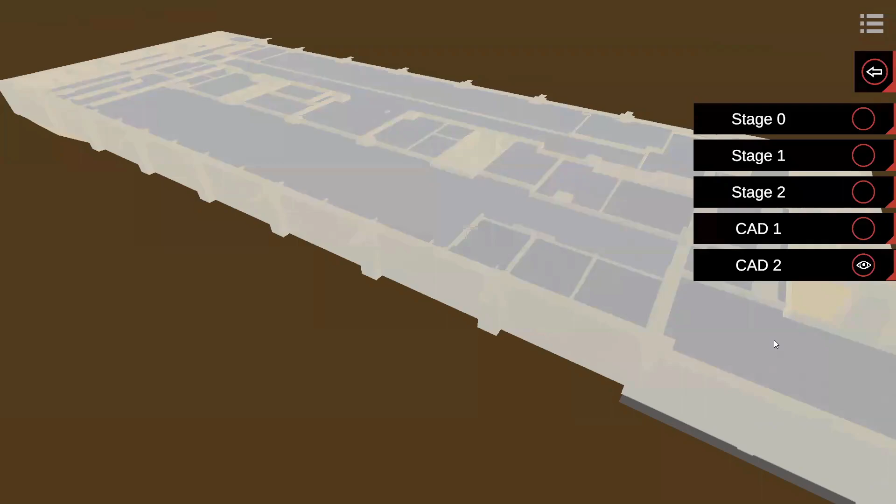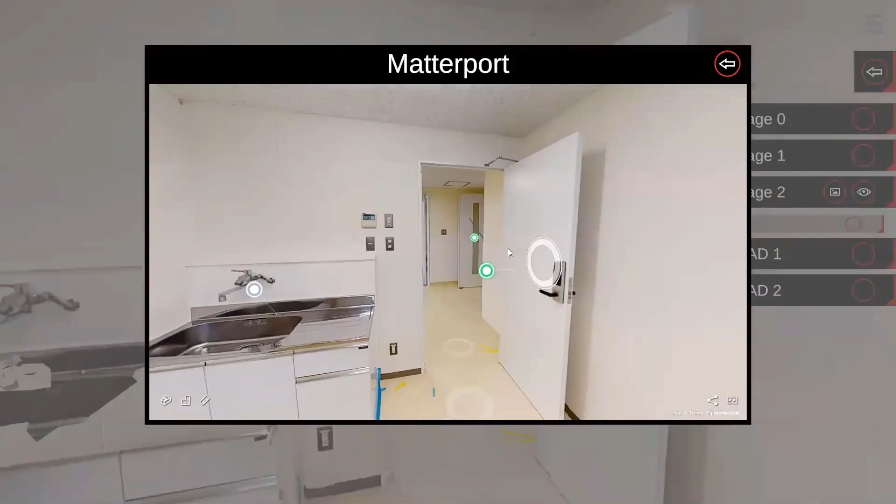So we are working for the digital construction department within Nohara, our team, and we provide services within BIM, consulting, 5D cost estimation, and digital twin solutions together with our partner SimLab. A video I'm showing you right now is our latest project together with our partner SimLab, and we're showing you here Okupo Hospital, which is displayed in the Stages app from SimLab.

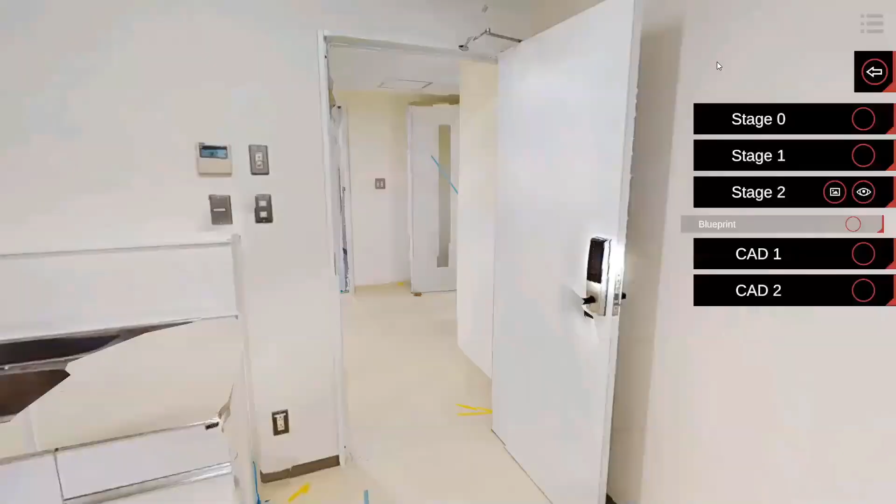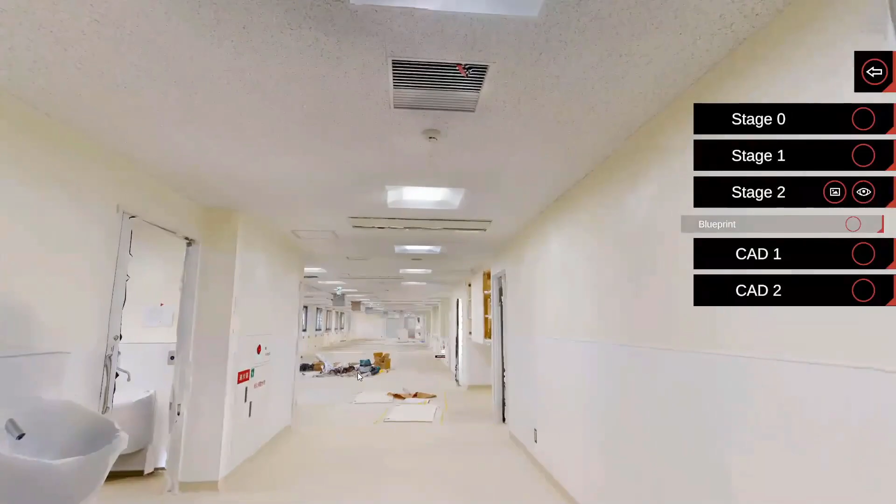What you can see here is a Matterport 3D walkthrough we are using. We use the Pro 2 camera to scan the hospital. We went there 3 times and did 3 stages of scanning. And of course, we tagged all the Mattertags here with information for our MEP contractor for medical gas, ventilation system, and doors. All the construction material that we provided for them.

So let's have a look at the current state of construction. What I'm showing you here is no groundbreaking news. You've seen it all. You've heard it all before. The construction business has generally been considered a traditional industry with limited appetite for innovation. We all know that. The economic sector with the lowest productivity gains actually, but we are all participating in this event to change that, right?

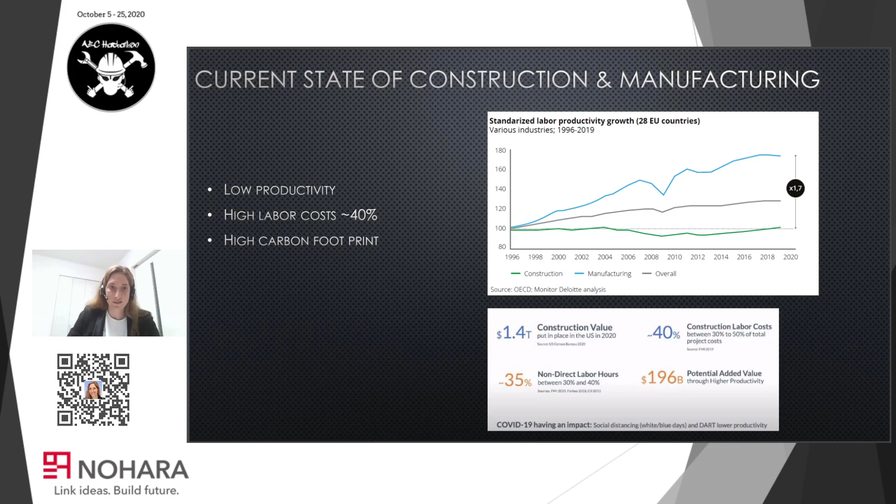We also think that companies like Nohara that are manufacturing and reselling materials can make a change because construction materials are closely related to productivity. They can have significant impact on labor costs as well as on the quality and sustainability of the assets. And let's not forget, there is a huge potential. When you take a look at the top 100 global construction companies, you will realize that 15 companies are from Japan. So there's a huge potential.

So what are the challenges in our industry? There are some specialties to Japan. And when it comes to Japan, you probably heard of the chronic labor shortage that is caused by the nation's shrinking working age population. Also, what is special to Japan is natural disasters. There is, for instance, the Pacific Ring of Fire. And that area is just around Japan in that region. And it happens to be that area where 80% of the largest earthquakes happen. So basically a pretty dangerous place to live.

So what are the external industry challenges that Nohara is facing? So let me give you an example of the current estimation process. Let me paint you a picture of how it looks right now. So a subcontractor will receive a bill of quantity from a general contractor, and this subcontractor is an interior contractor for LGS profiles and partition walls. So he will receive this BOQ probably in an Excel file or PDF format and some 2D drawings in PDF. The line items in the BOQ will probably be like total amounts. Maybe if he's lucky, there are some amounts per room, but he basically has no clue where those quantities are.

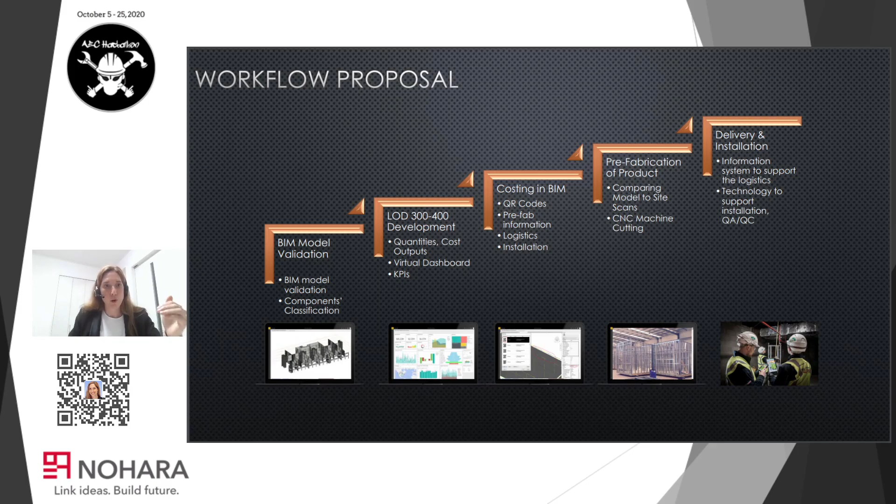Thank you, Stephanie, for the context. Thank you very much for the timeline of our presentation. And I'm just going to jump in straight to model validation. So in order to validate the models, and actually even just to highlight what is the biggest obstacle when we do costing or when we do detail enrichment, and that is the quality of the models. Because that's such a big obstacle, it's like a foundation for everything else. So if we get this wrong, everything else is going to have problems.

And to ensure that the foundation is correct, we need to share what is part of our process with the rest of the team so that they can incorporate our considerations into their workflows. And to do that, the easiest way is to create some kind of a guideline which we can easily explain, and which can help the rest of the team involved in the model creation understand how to set up this file so that it is free of most of the errors. And just to show you a couple of common errors that we have in the models, I should first refer to a method for validating those errors.

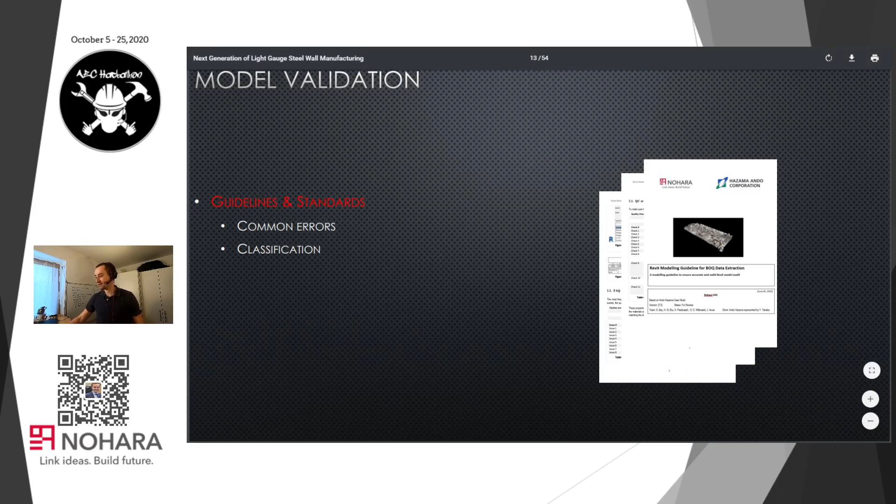So, of course, every model has warnings, Revit warnings. And usually it's a common practice to ignore them because Revit tells you you can ignore them. So why would you not ignore them? And then often there are problems which you can't really solve. For example, part of the frame somewhere inside of the door family is going through a wall, and you know that this is the size of the door and this is the size of the corridor, and you want to have it this way, but maybe there's something wrong inside this door family that is actually making that clash. And maybe later when we take quantities and we check the area of this door, it is actually reasonable that this error is showing up.

Maybe there is a floor that is clashing with another floor, and that usually again creates some kind of an overlap, and it increases the area or just shows inaccuracy in those areas. Maybe there's two walls, one overlapping the other, or maybe a wall is slightly off axis, and then when we try to generate geometry inside of that wall, all of these generated geometries will have the wrong reference point and they will all be slightly skewed. So we do have tools where we can check what kind of error this is and what kind of warning message it gives.

And we can also highlight using Dynamo what kind of errors are where. And this is a little bit easier to troubleshoot than the Revit warnings, because Revit warnings just give you a general list, and then you have to press on each warning and it will tell you where that warning is located, and it can be a very lengthy process.

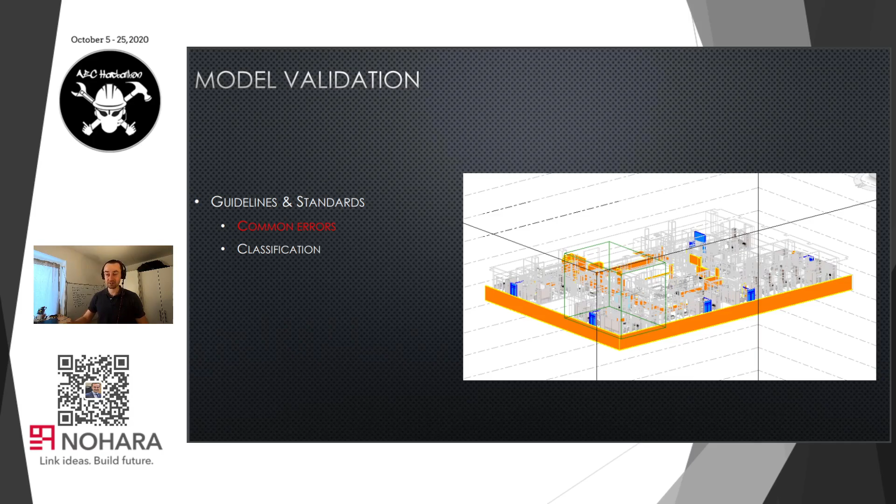If you could have an overall visual and see where the problems in the model are, I think that's a little bit easier to digest, and without using the warning editor, you could basically just press on those elements and fix those warnings on the fly. But there are also warnings which are not very visible or not even highlighted by the warning script.

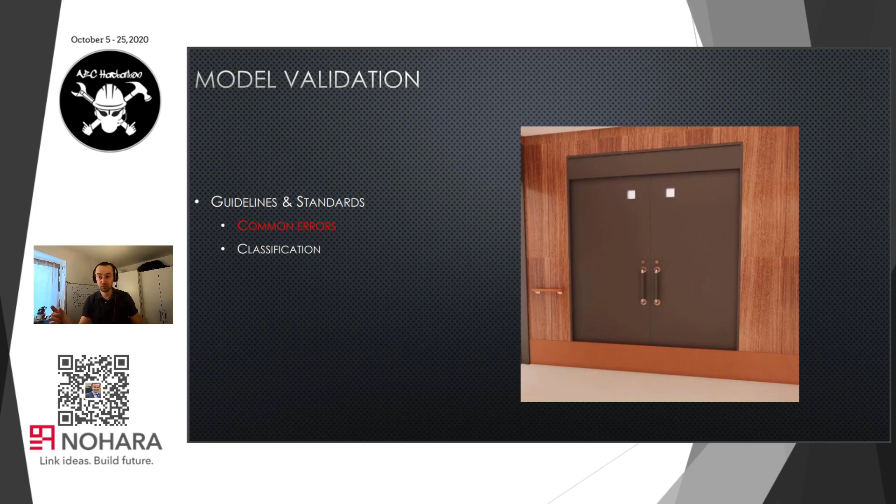For example, when we generate finishes, sometimes the door geometries are perfectly fine. They're cutting the void through the first wall, but maybe they're not cutting voids outside of that first wall. So if we add a couple of millimeters of baseboard, this baseboard is not going to be cut because the void of the door is not long enough.

There are also other errors which are actually very easy to make. I don't know if you guys ever tried inside of Revit to join 3-4 walls of different type, of different thickness, where maybe their layers are slightly offset, which is maybe the way that it should be, but Revit doesn't really want to accept that.

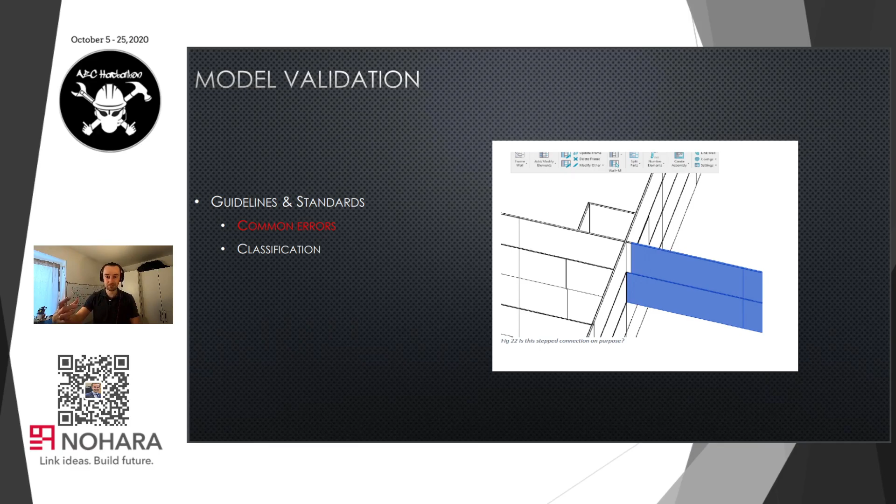And sometimes there's a small omission, and for example, a wall goes a bit longer over the connection, and then once we want to generate this wall, it will take each one of those walls as separate elements, and that little partition part of the wall with the wrong wall type will be framed as the wrong wall type and will give us inaccuracies again.

And then lastly, we have classification. It's a common standard to use different classifications. In our case, we are mostly looking into Uniclass, which is very popular right now in the UK. Before that, we were using MasterFormat. I know that there are many other standards in Europe, Australia, New Zealand, the US and so on. We can actually assign any of these classifications.

However, they all kind of lack certain components. They lack certain precision at our level of manufacturing. They are more general for systems, more general for products. They often don't have the distinction between the same product family but different thicknesses of those product families, or systems which have different spans between the studs, in our case for steel structures.

So we are creating our own classification code which can accept any kind of differentiation that we want to achieve. We go with the most obvious part, which is our standard classification material code. Then we add the layer thickness, then stud information, then insulation, then the stud profile, and so on. So we can very accurately specify what kind of information should go into these.

And then we can, of course, link other classification codes, and often we see that there is a repetition. It's the same classification code for our different codes, and that clearly shows that we don't have enough distinction to cost these elements using the standard classifications.

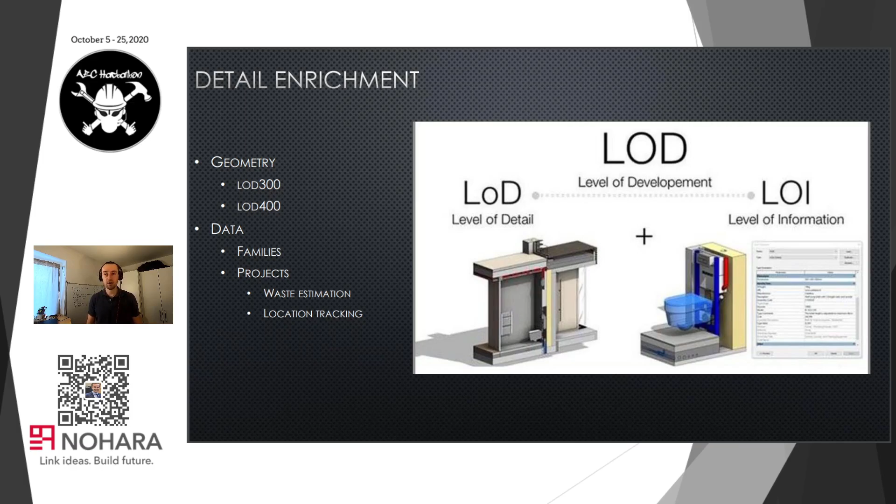And that's where we add information about the location of those elements, the waste estimation, the parameters that are distinguishing projects and families, and also how we can choose those projects and families that are a composition inside of our model. So there are different levels of development, and basically it goes from a lower level of detail to a higher level of detail.

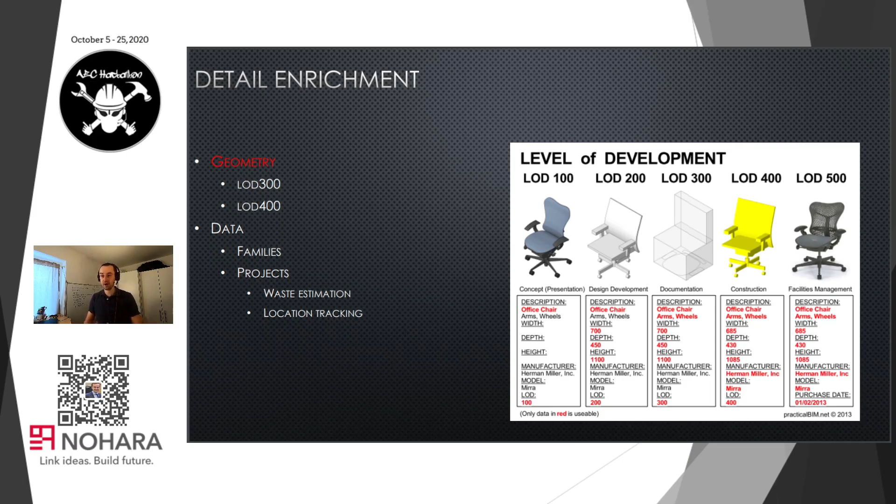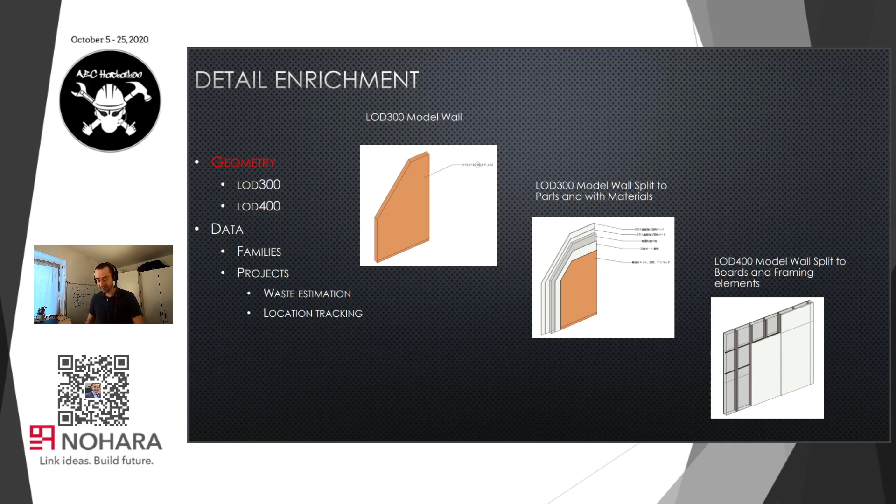And in our case, for example, if we enrich a level of detail for a wall, we're starting with just a generic wall. We add layer information to this, and then we split it into parts. And then each of these layers is a separate part. And then we use AGACAD, which is a software for detailing, to actually split those parts, split those layers into smaller parts and horizontal and vertical grids, which divide our plasterboards with some rule-based schemas. They replace wall layers and place steel studs inside of those layers.

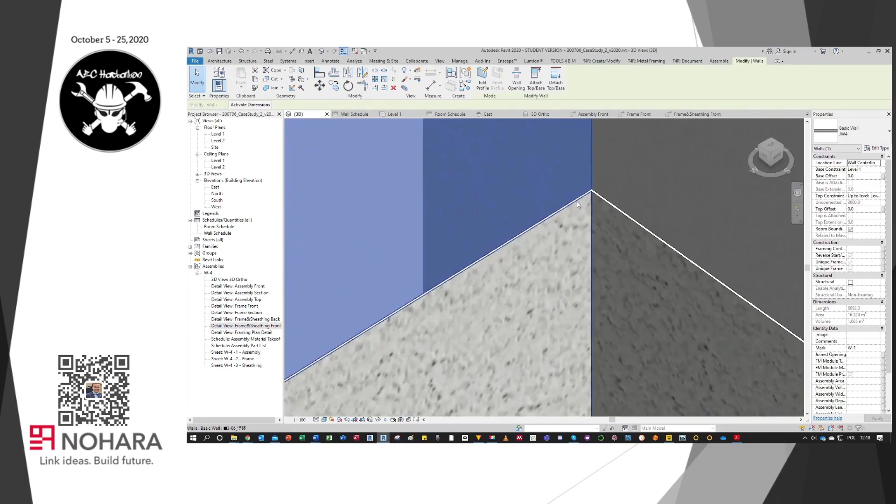So this is how we add information to geometry from data. So for example, we can generate finishes and we can generate baseboards. And here you can see, for example, how we generated this paint layer, which is separate from the main wall. And we can also frame the main walls, select just these main walls separately. So we can also cost these layers separately. And the importance here is that we can have a structural wall that goes between many rooms and then have finishes that are dependent for each room. So it's nice, this division there.

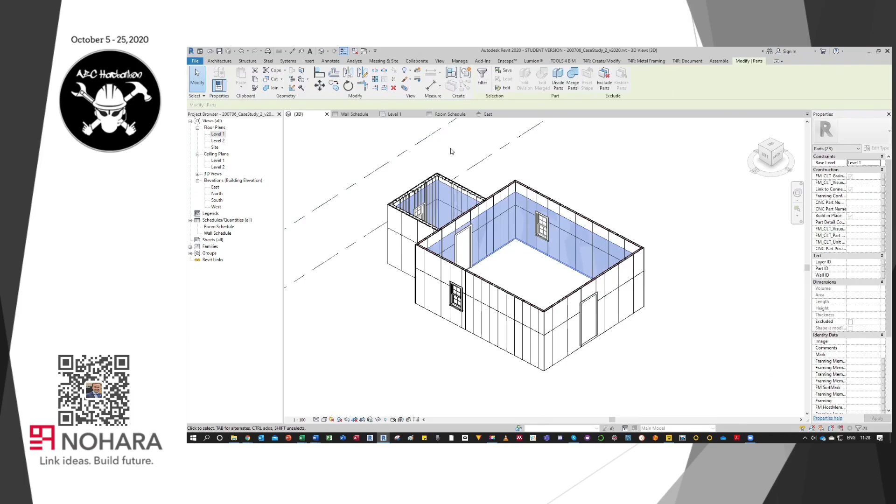We can also create assemblies from these, so we can choose certain elements that we want to use for assembly. We can number those elements and we can place them on sheets. And here you can see we can also dimension them and create shop-ready drawings for that.

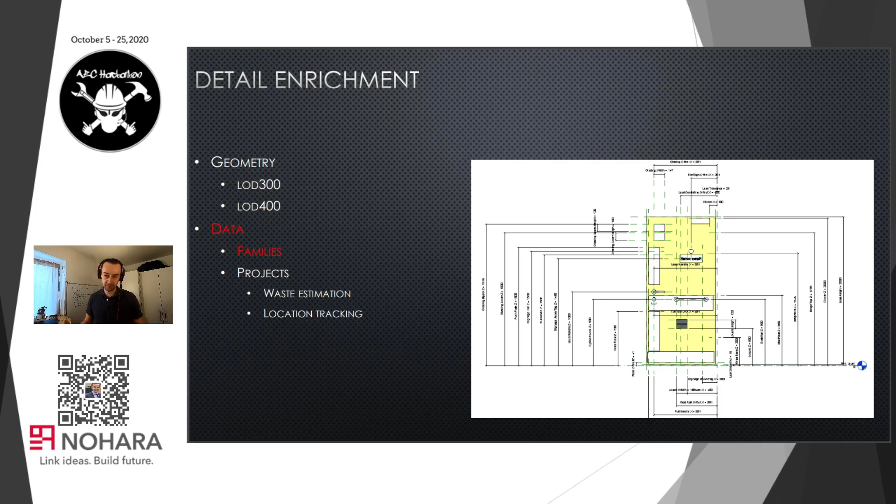So we also enrich data when it comes to families. So for example, Nohara is a manufacturer of doors, and to manually cost specific doors, I mean, we're not talking about just doors that you could install in your home and they have a handle and a leaf and maybe a lock. We're talking about doors for hospitals, which often have mechanisms for fire prevention. They are actually sliding. They have special acoustic properties, pneumatic opening, and so on. So they are very complex door families, which take a long time to cost manually because they can all be different. They can have different dimensions, different materials that are composing them, different frames, etc.

And it takes as long as 2 weeks to cost one type of doors, or maybe one project with different doors for a client. And 2 weeks later, that information might be no longer relevant. So we try to make a system which will enable costing those families and those doors, for example, and choosing them, specifying them as we go. So we have a drop-down list. We choose all the components. They are all costed. They are all connected with a classification code, and they can very easily be basically assembled together. And the price is a bit like specifying a car purchase online.

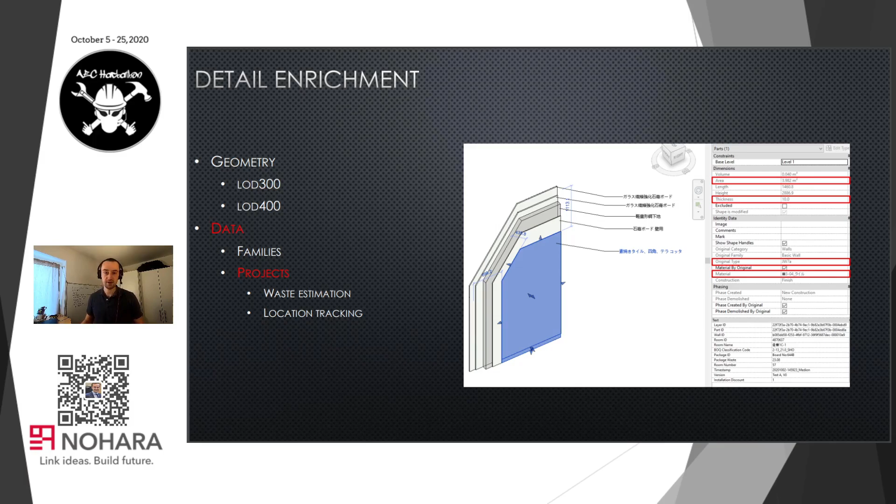We also enrich data by adding waste information. So we can basically use bin packing algorithms thanks to the Miscellany package in Dynamo. And basically what we can do with this is we can cut our plasterboards into parts and estimate which parts can be reused in which room. And the bigger the project, or rather the bigger the area that the same plasterboard can be applied, usually the lesser the waste. So we can optimize that waste quite considerably by using offcuts in different locations.

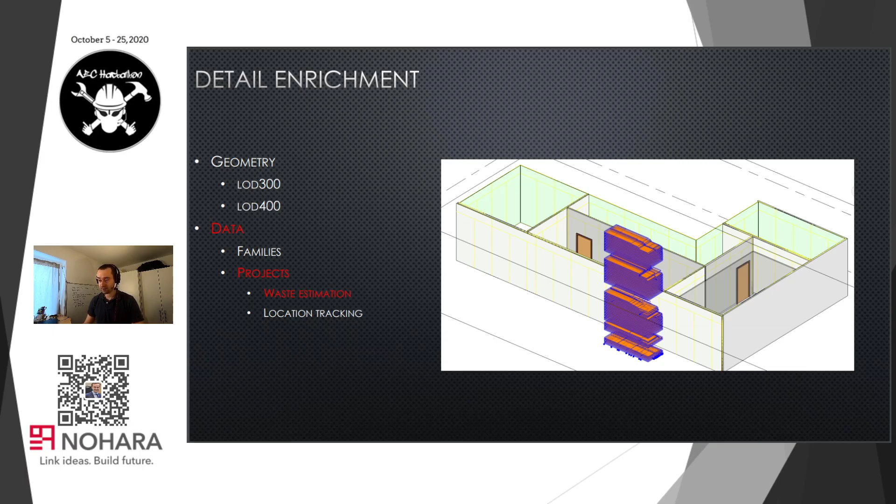And then we can apply QR codes to those plasterboards to know where that element could go as an offcut. So we know, or rather somebody that installs the board on site will know that this plasterboard has its use application in those rooms. And if there's an offcut from this plasterboard, that's where it should be located.

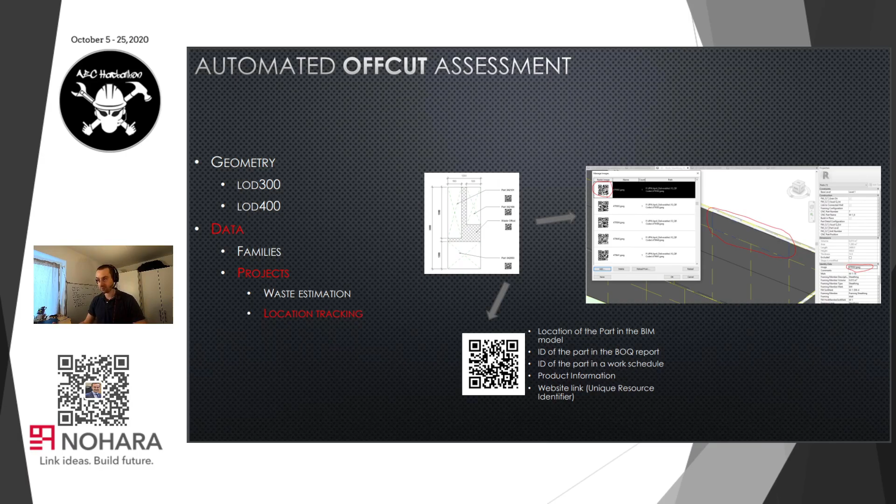Of course, there are some limitations to this. You're probably not going to move a plasterboard from the first floor to the other end of the building on the fourth floor, because just the logistics of moving that plasterboard might be more expensive than the actual plasterboard. But if you can safely use an area which is optimal for moving that plasterboard and reuse that material, well, then it's not just the cost that's optimized, but it's also the waste and the care for our environment.

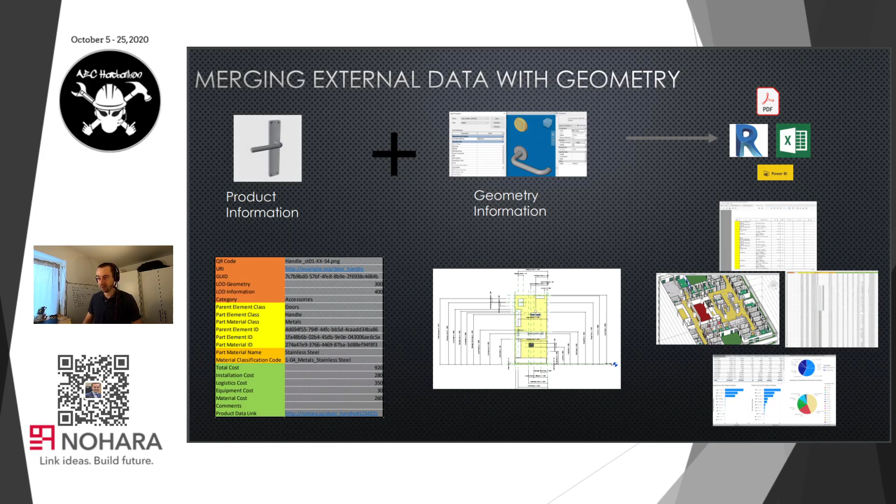We then merge this data. So we take the product information and we take the geometry information and the location information that was added to this geometry information, and we combine it all together and give a meaningful report to executive viewing, so that we can have a cost report, we can have a 3D model annotated with this information on top, and we can have variable cost models. So, for example, we can compare options, we can change layouts, we can change setups, change materials, and very easily see how the choices the designers make can affect the cost.

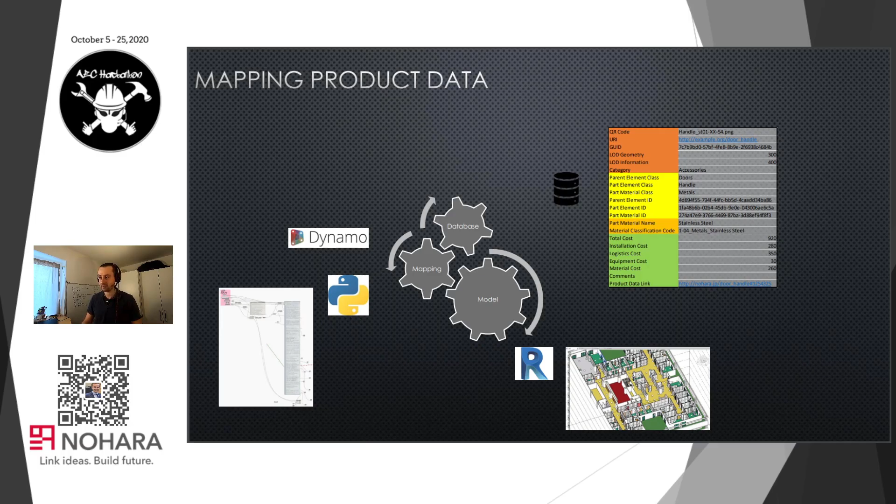And the way we map this data is right now by using Python and Dynamo. And we basically use classification codes to map the database with the geometry in Revit, and we export this into new data files. So here's a video of how this process works, along with the enrichment of data.

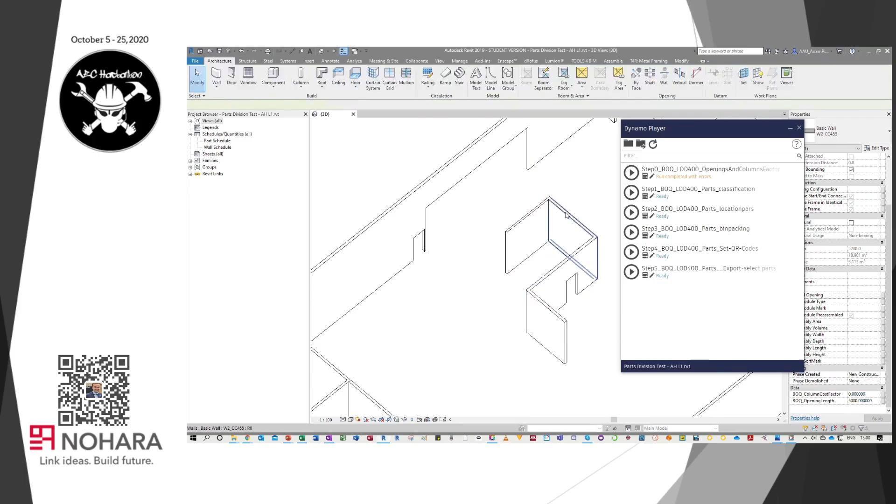So as you can see here, we have a model which is divided already into plasterboards and framing. However, we're just going to create this from the start. So here's a couple of walls with a door inside, and as you can see, AGACAD is doing its magic, and it's splitting the walls into plasterboards and frames.

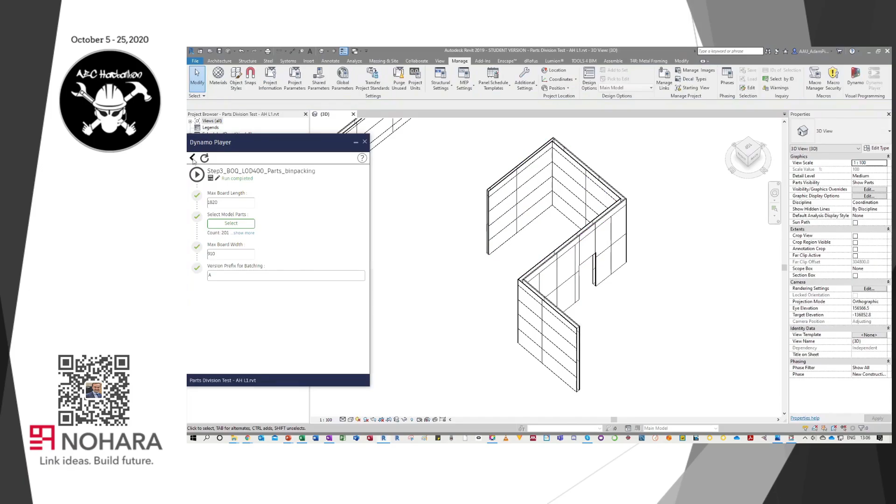And then we are actually adding information to those plasterboards. So right now we're adding the classification code, and then we are adding other information such as room ID and location and the parts ID, so that we can recognize where those elements are. We are then adding QR codes, and you can see here that the QR codes can be checked on each element, and scanning your phone could give you the information that's contained within the QR code. And then the elements are ready for export.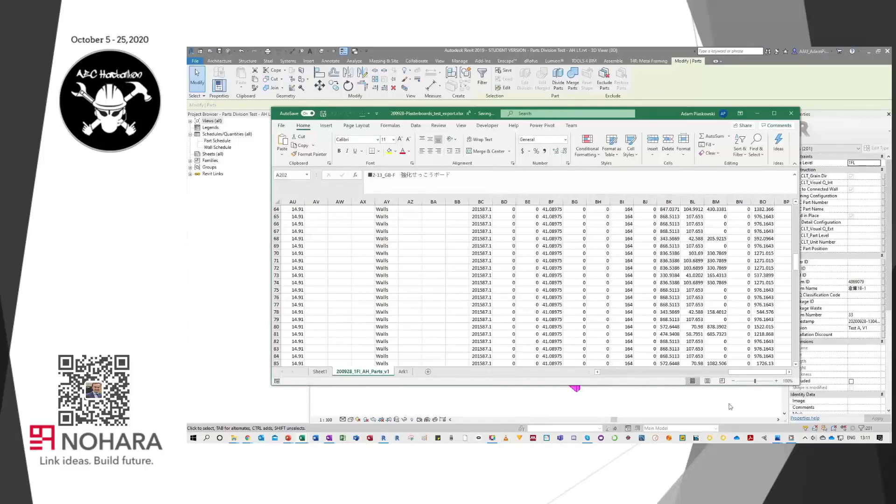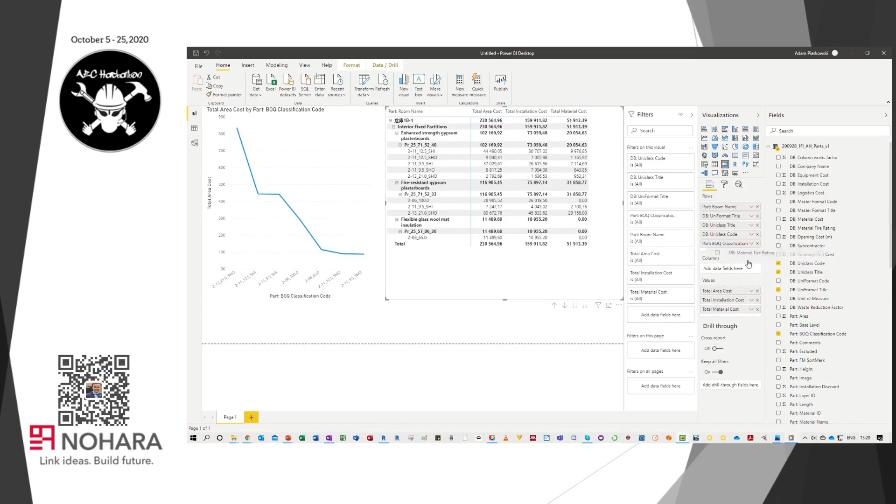So here we can just load this information to Power BI, and we can show you some simple graphs, how we can filter this data and show you what kind of costs are associated with this data in there. So there are also different cost factors which are influencing the final cost, and that could be, for example, openings. We need to put extra reinforcement around openings if we are not having this done already by LOD 400 model. But if we're looking at LOD 300, we don't have the accurate geometry of every steel frame. So we create some assumptions for where that steel frame could be more expensive.

We can also look at installation complexity. So if we have a column, it's probably going to take significantly more time per square meter than it would be if it was a flat wall. The same with openings. So we can actually use algorithms to derive where these occurrences exist in the model, and we can apply factors which are going to factor in the costs. And that can also work for productivity ratios and price development. So for example, if we only have so few of this material in the model, its unit price is going to be significantly higher than if we had, I don't know, 10,000 square meters of this material, because of course the economies of scale influence the cost.

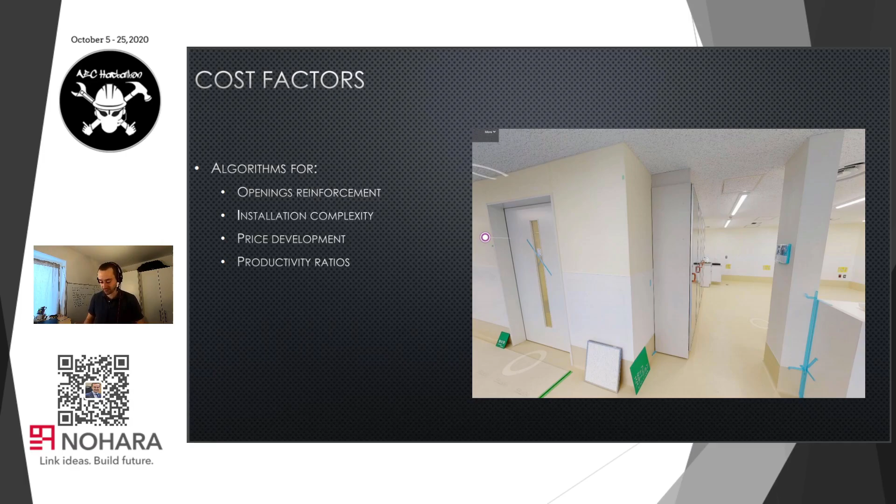So here it's a small kind of excerpt from a costing report. You can see, for example, here how we can optimize the construction waste. And if we use just a standard assumption that for plasterboards our waste is at around 15%, actually it's a very generous 15%, because it can go up to 30-35% according to the British standards. And we can optimize this by reducing those to around 9% for this particular case. It is again very case dependent, and you can see that the bigger the area, the lesser the waste, and the smaller the area, the higher the waste. So it also depends on the size of our building and on the reusability of a certain material type.

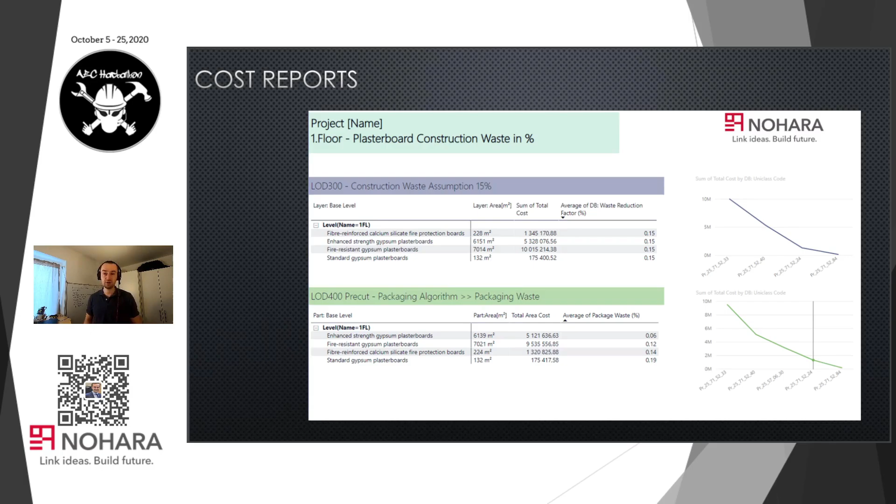So just to sum it all up, this section, we can reduce waste, we can reduce manual errors, because the errors that can really happen are only at the beginning when we validate the model. And there could be errors in the way that we do calculations, or there could be approximation errors. However, they are very easily looked into, because this is basically just like a sheet with different kinds of factors and different kinds of multipliers and a cost database, which, let's say, has a few hundred entries.

And then from that, we can generate thousands of individual price points for each element, which we can later filter. And it's much easier to find errors, if there are any, rather than if this was a manual calculation performed by a single individual or a group which had a certain way of doing it, and communicating that method would be more difficult to somebody that would validate this. There is, of course, an inherent reduction in errors based on the fact that it's a computer that does the calculation, so the human error is also omitted, beyond just having the wrong price point or a wrong factor.

And also it's very dynamic. So if we change the model, if we change something in the model setup, it's easy to recalculate that change following the update. However, this is not a magic bullet.

The setup is quite a lengthy process to set up the generating software properly, to set up the databases, to set up the classifications, the workflow order, and families that enable this parametric design. It is a considerably lengthy process, and of course the accuracy greatly depends on the model that we receive. So there's no 100% assurance that this is actually going to be the cost.

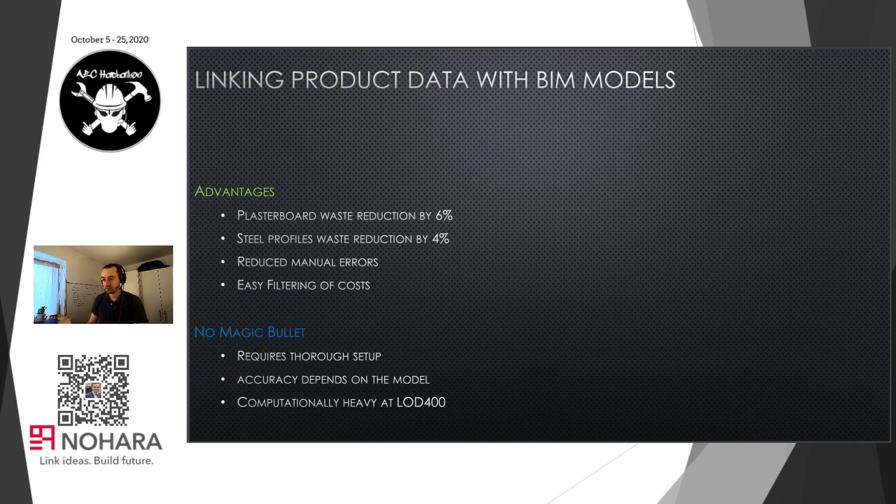Thanks, Adam. So now I'm going to talk about the idea and concept we are exploring and doing research about, which is how to do the validation and comparison, or even auto-generation between the scan data and BIM model. As we all know, there are basically two directions or two concepts.

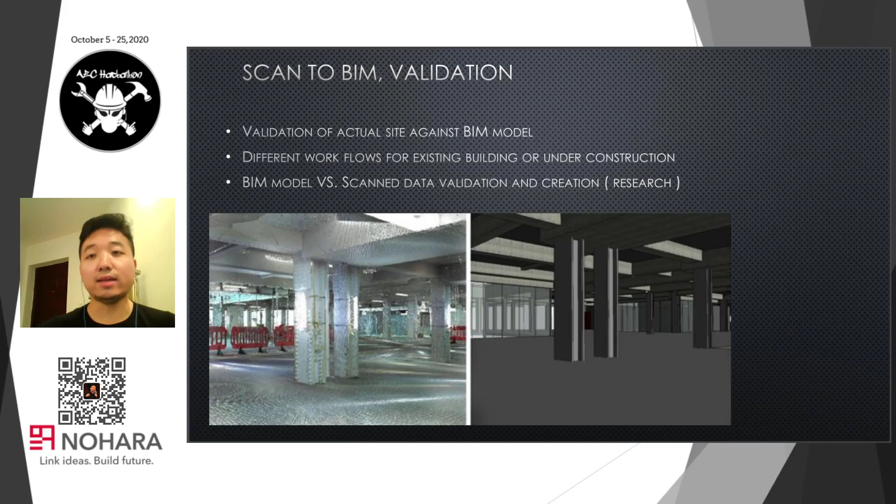The first one is regarding the existing building. We need to generate the BIM model on top of the existing conditions using either laser scan or some other tools to do that. The other way around is to have the new project. We need to keep updating the BIM model so that it can match the existing as-built conditions.

And for renovation projects with the existing building, the most used tool is to do the laser scan, and we generate the BIM model using the scan data as the basic foundation. For ongoing construction, we do the laser scan or some other scan, so we can have an as-built model to do the BIM model validation against that.

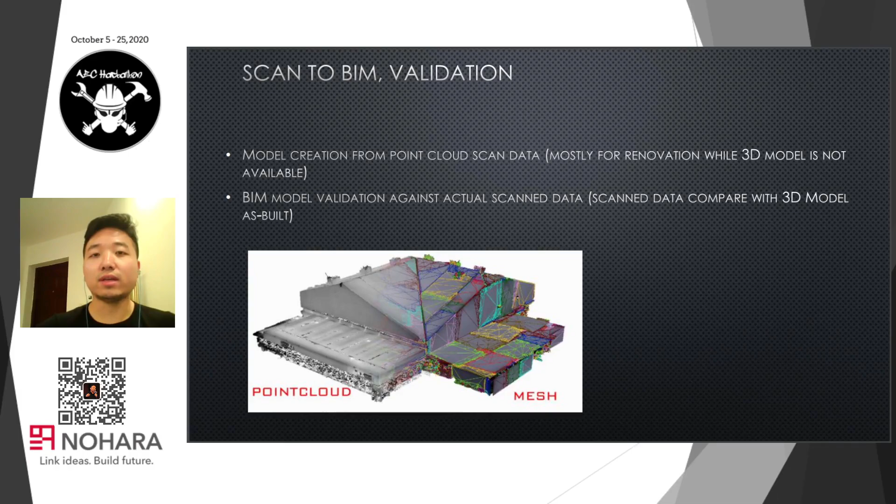There are some tools or softwares we are doing research about. Here are just two examples. The first one is Cintoo. What they do is they can do the conversion between the laser scan and the digital twin.

It's a middleware. We can import the digital twin laser scan data, and they can do the validation of that so that it can support our generation, either generation of the BIM model, or it can compare with the BIM model so that we can find certain mismatch places.

Of course, the software keeps updating, and they may have so many new functions we do not know of. So this is just one explanation of this software.

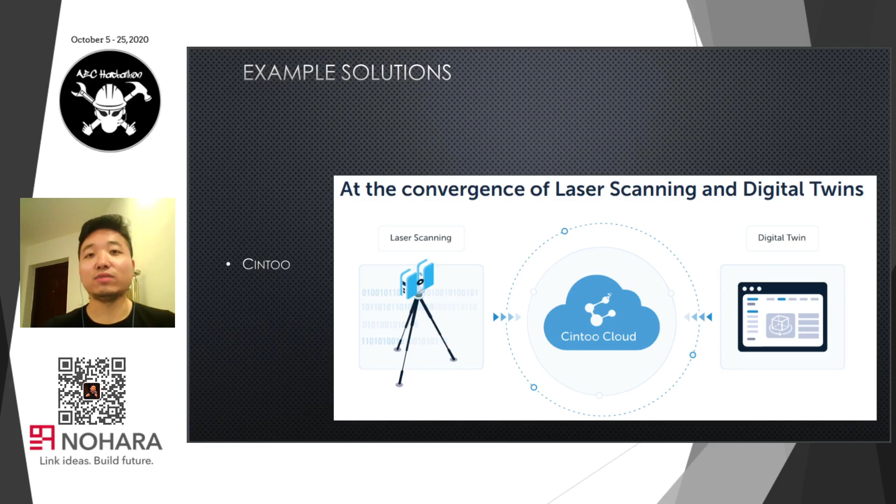What they do is they can import both the digital twin data and the BIM model altogether. Just like we do clash detection, they can detect, okay, this part there's a mismatch, and this part there's a certain missing part either in the BIM model or the digital twin data.

On top of that, they have this really smart algorithm. They can auto-detect certain objects, whether this is a door, a window, a floor, a column, or a beam, so that it can somehow help us to do the generation or updating of the BIM model.

Of course, the software is not perfect. There are certain parts, there's stupid mistakes, so it's not perfect. But anyway, what we are trying to explore right now is, either there's a certain tool or certain best practice,

we can do a much more efficient and smart way to do the validation or even auto-generation from the digital twin model to the BIM model. So this is what we are trying to explore.

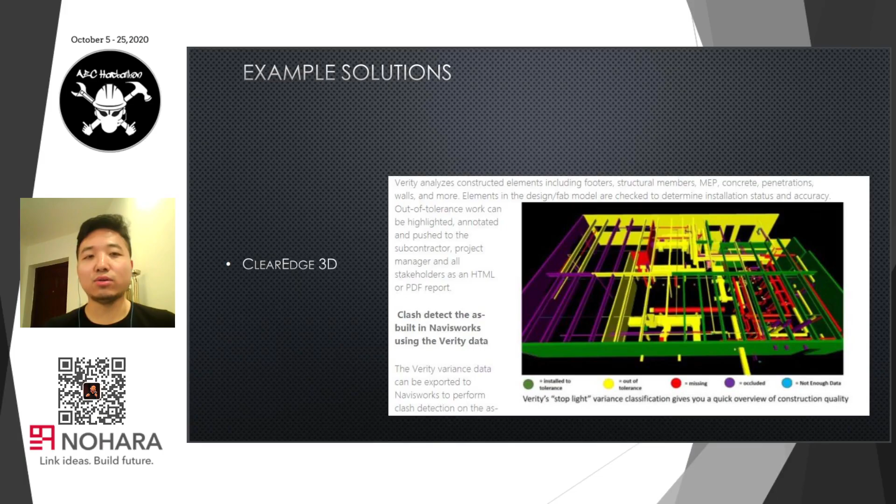I would like to show you how our team used the process mentioned above to create one of our core products, N-PITA. Based on the architect's model, we make precise element parts so we can create a proper cost estimation and prefabrication drawings. But what is the N-PITA product? It's an indirect unit for lighting which can be installed on simple ceiling constructions. We wanted to create a precise BIM content model with manufacturer data, ready for prefabrication.

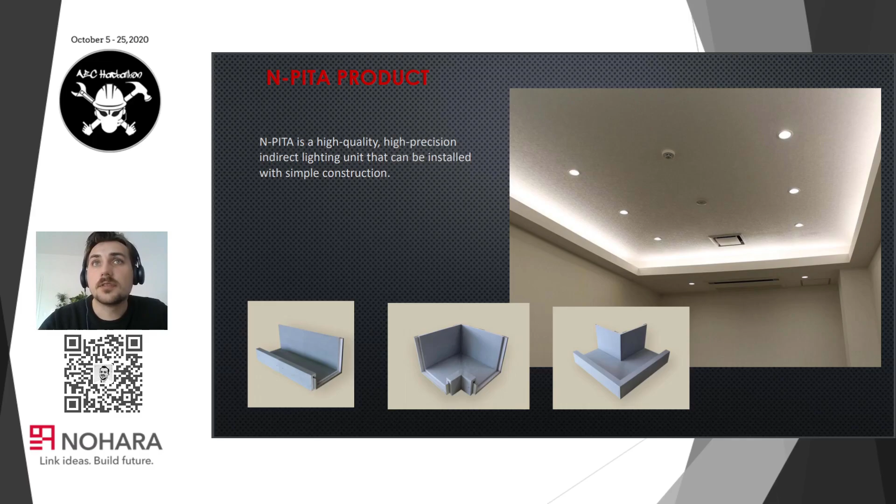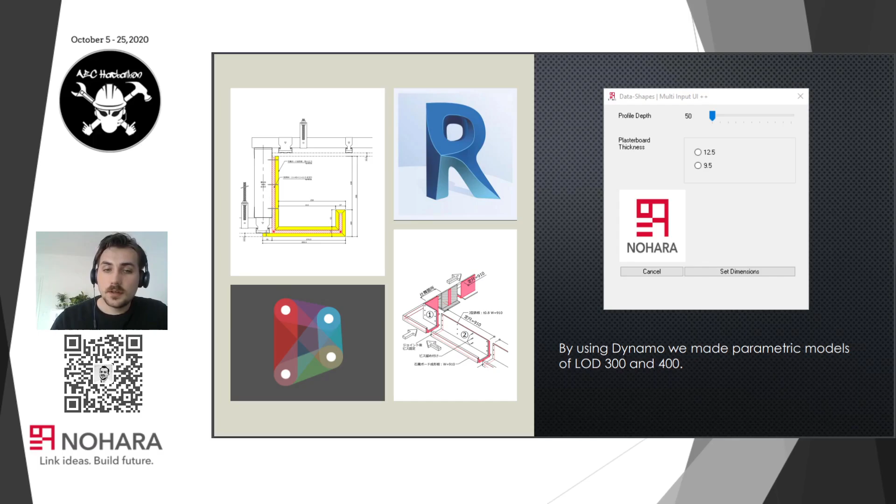To do that, we use Revit software to create LOD 300 models and Dynamo to create the LOD 400, making it more customizable. We used Data Shapes to create a user interface so we can configure the profiles and overall dimensions. Let me guide you through how an N-PITA model is actually created.

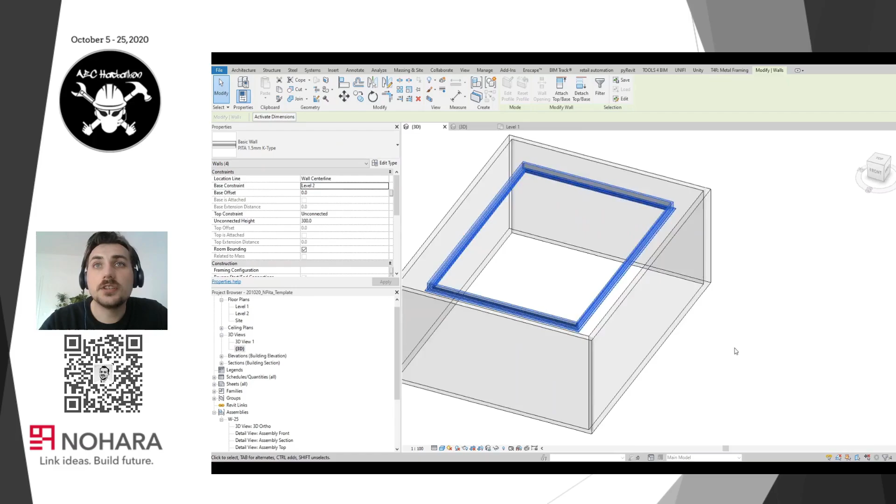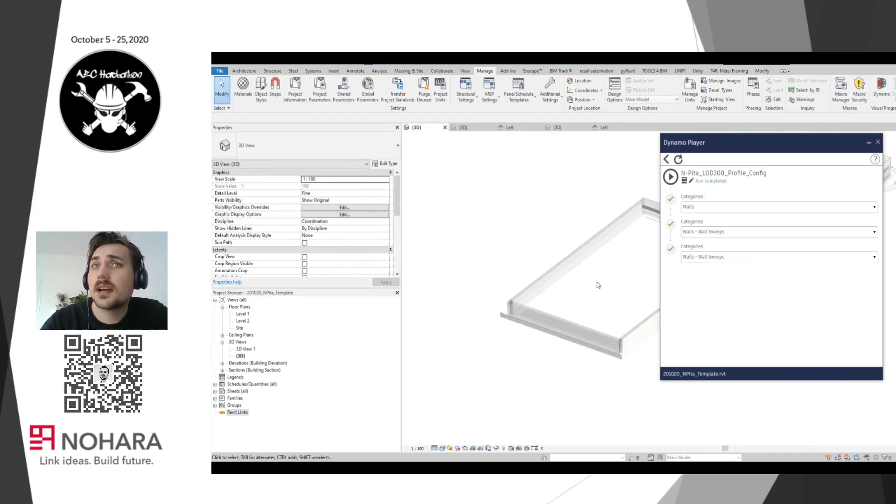For LOD 300, we use wall system families to insert the N-PITA profile type as a sweep. Using the Dynamo script, we change the profile dimensions to prepare it for the 400 model. We use a user interface from Data Shapes so we can change the plasterboard thickness and profile depth. This simple model can be used by architects for lighting visualization, for example.

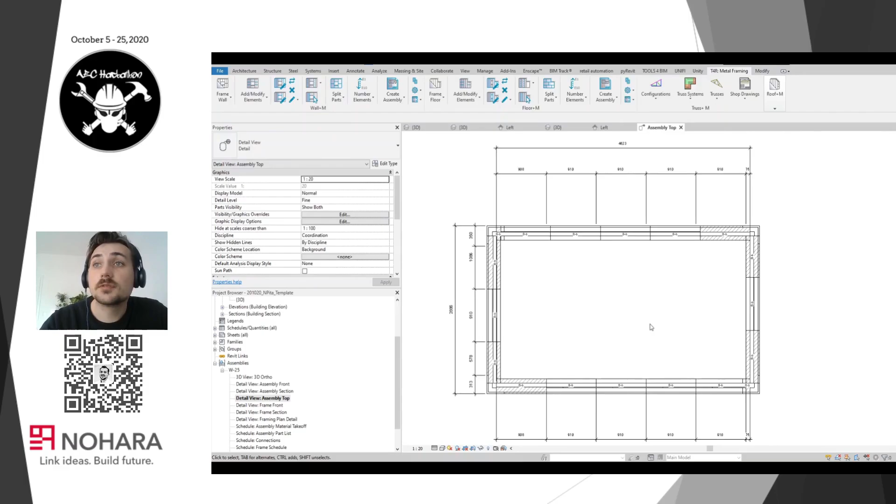After that, we use the AGACAD tool to create the proper LOD 400 model with studs, plates, and covers, so you can make precise cost estimations. In the end, we create an assembly with all these parts, and Dynamo scripts help us automate dimensions and tagging. With fully detailed drawings, we can easily automate the manufacturing process. Instructions and drawings can be used directly for CNC machines, and that's exactly how we're doing it right now.

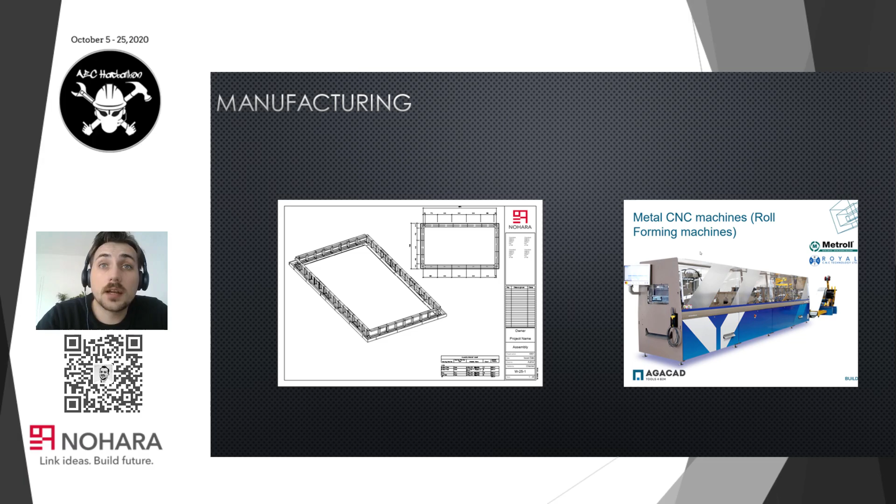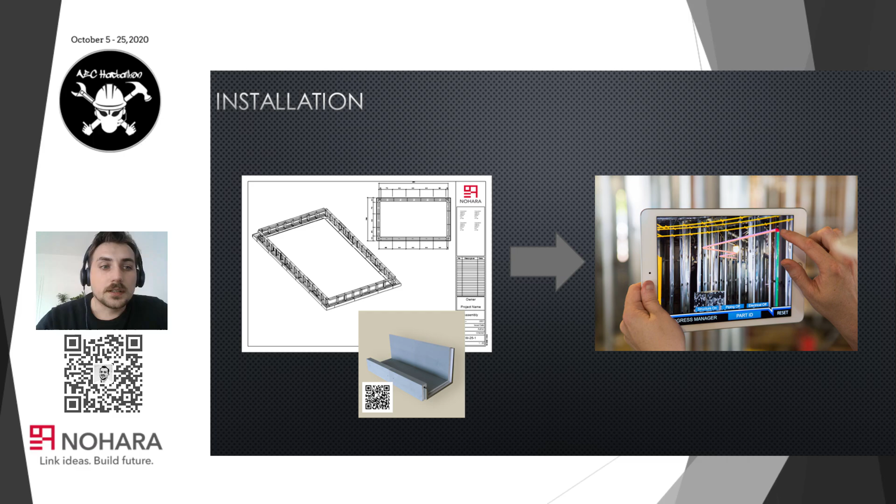In the future, we plan to create manuals using augmented reality models to fully recycle the available technologies. By using QR codes, for example, we could locate elements on the construction site from the model. Unfortunately, for now, we still have to wait for augmented reality hardware to become more practical and widely used. Well, that's it, thank you for listening, and I'll give back the voice to Stephanie.

So we've come to the end of our presentation. We showed you our current state of affairs. We explained how we want to disrupt the current business model by making pricing more transparent and automating cost estimation processes. We talked about model validation and the importance of high quality BIM models.

We talked about our research on scan-to-BIM, and showed you how we can automate framing with AGACAD, create assemblies, and add QR codes with Dynamo. We also talked about waste reduction today. Please remember, this is coming from a manufacturer—our business is to have high volume sales. But still, we think this is the right approach, because if we want to change the game, we need to adapt as well. We're convinced that by providing these solutions, we can set ourselves apart from our competitors, which will eventually lead to more customers.